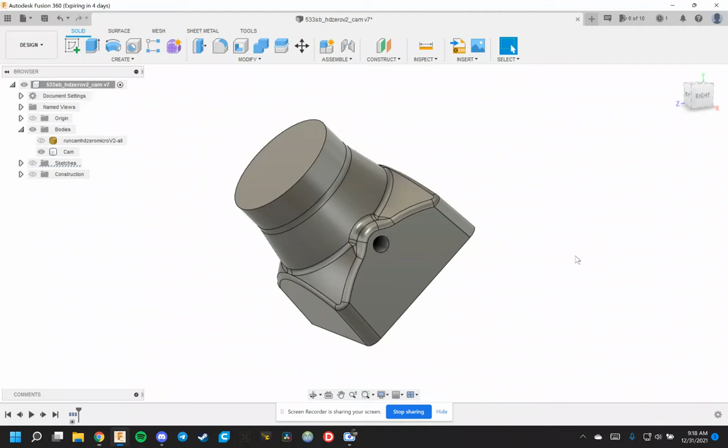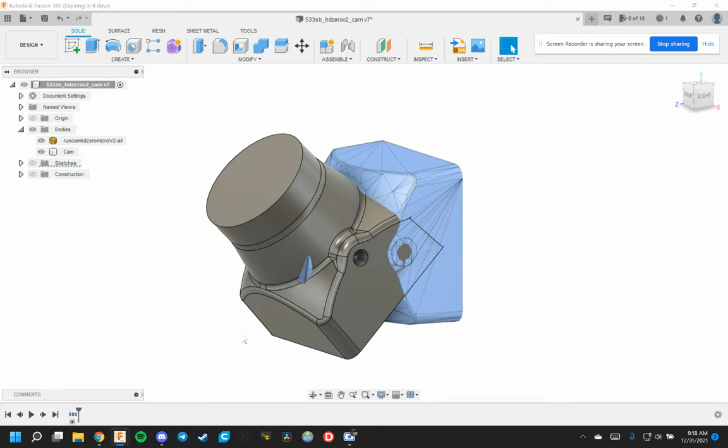Okay, so first things first, I needed a body to work with. The file provided for the camera was a mesh file, so I imported the mesh, just created a new file, inserted the mesh, and then when you bring that file in, you can basically clone it.

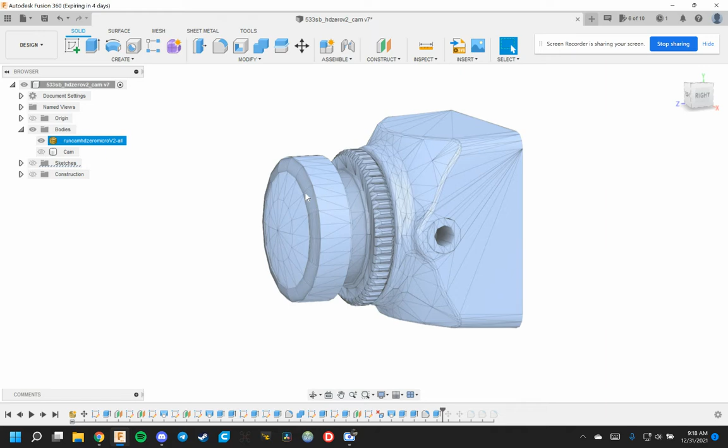There are details you obviously don't need, like this little lens retainer thing, so I just made a cone shape to cover that up. I'm thinking ahead about what the inside of the mount is going to need to fit the camera, so you only need basic geometry for that.

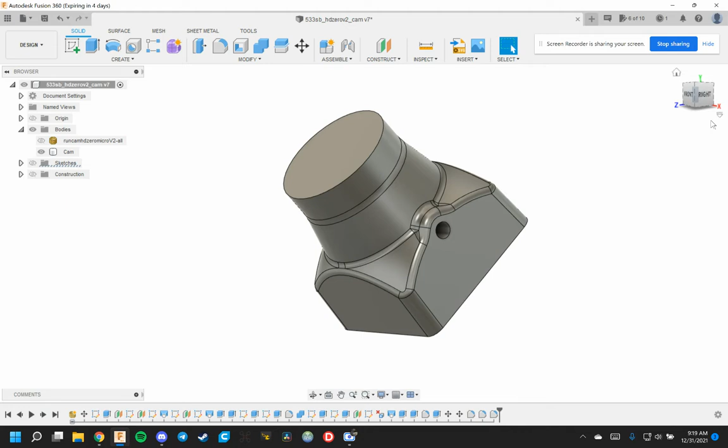Once you get that done, position it. I got the 45 degrees right here, and then start from there. I did a sketch back here and an offset of this perimeter. I think I was doing everything 1.6 millimeters, basically a multiple of a 0.4 millimeter nozzle.

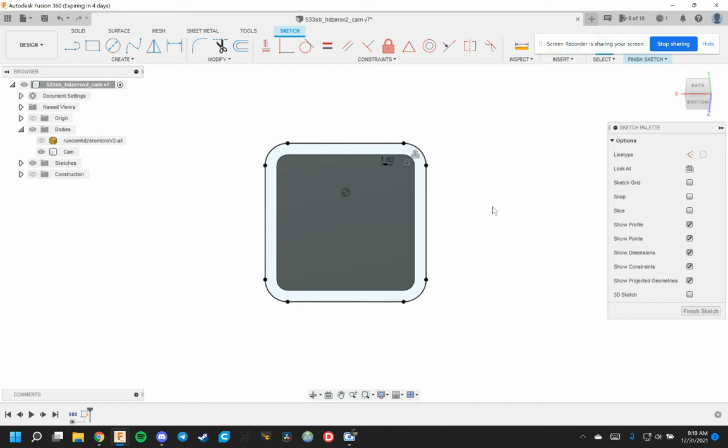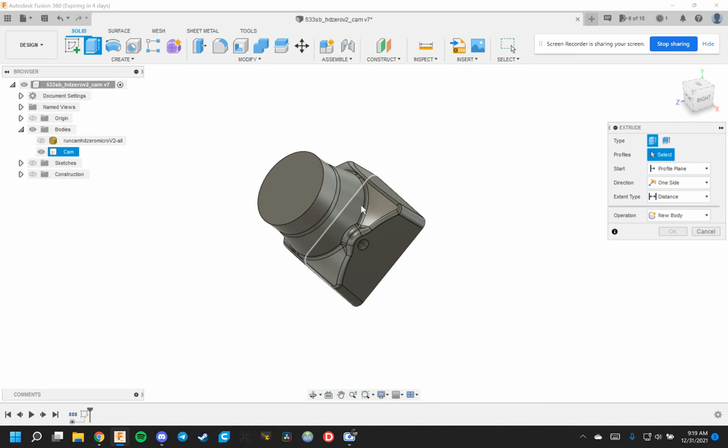So you've got to think that you want to create a shape that you can cut the camera shape out of. By doing this offset here, you can come in. Let's take the camera away for a minute. You can extrude a box out, extrude it out to the length of the camera.

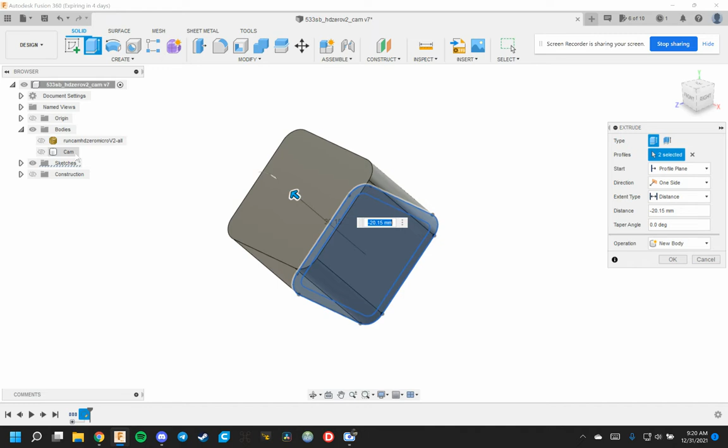Now I want to do a new body, and I want to make sure—well, I can leave the camera highlighted if I select new body. Select OK, and now you have two bodies: the square you created and the camera inside.

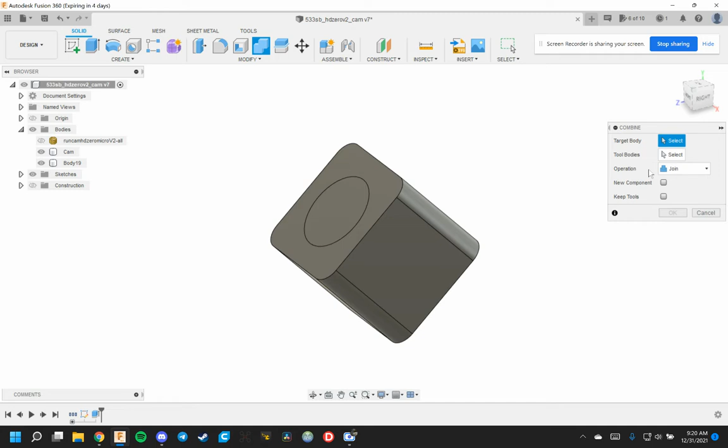Now I want to cut away the camera from the outside shape. To do that, you use the combine tool. You select your target body—the target is the body you want to cut. I'm going to change the operation to cut, select my target body, and then select my tool body, the body you use to cut away with.

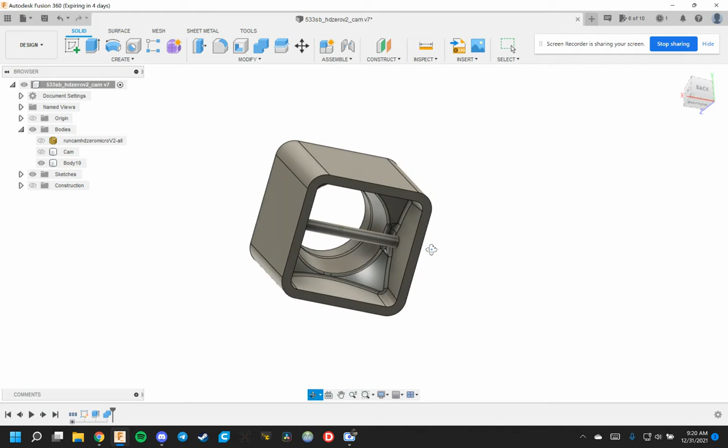Keep tools, because I want to keep the camera—I don't want it to cut away and disappear. Now I can deselect the camera and I have what's left over. This is just left over from the screw hole that goes all the way through, so you just select it and hit delete, and now you have your basic body.

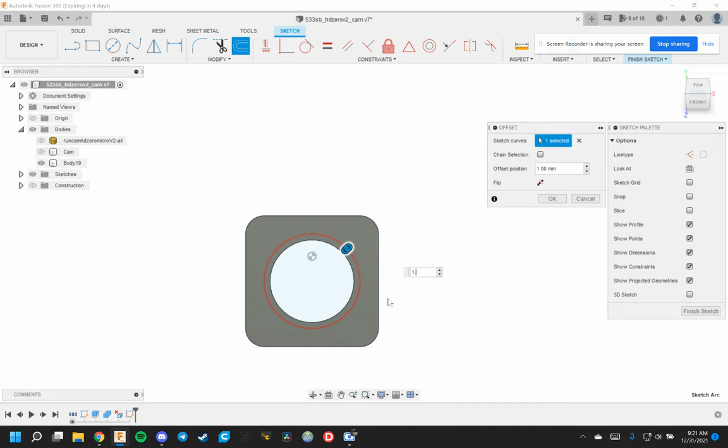Next thing I did was create a sketch here, offset this circle 1. Now I want to come in and take away some of this material, so basically I came down to just where I can't see any space there from the camera.

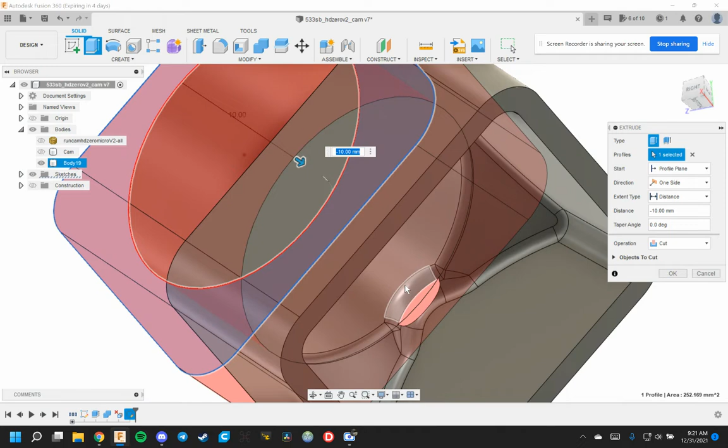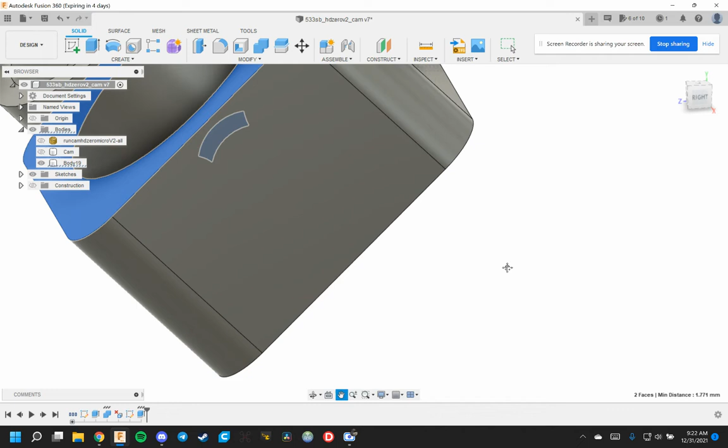You can see this opening here—you obviously don't want to see that. So you come up, and I added a few extra millimeters just to give it some absorption here. You can highlight the inside and see how much space you have. If you want, you can select this face, and you can see you have almost 2 millimeters at the smallest distance—from about here to here is about 1.7 millimeters, so that's plenty.

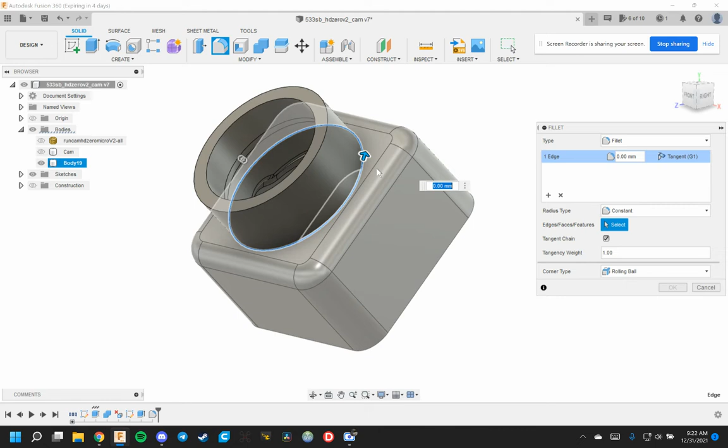Next, I came in with a fillet here, probably 2 or 3 millimeters—probably 3 won't fit, so 2 millimeters. Then I come in with the fillet here, just playing with it until I get something I like. Okay, so now you have the very basic shape.

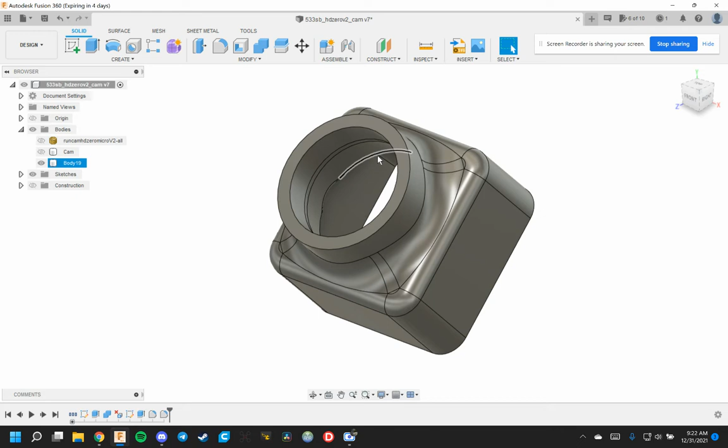Next thing I did to get the cone, you need to do a loft. You can't loft off of a face with a hole in the middle of it, so I did a sketch here, and then you extrude this circle, minus 2 or 3 or whatever you want, just to create a solid face here to work from.

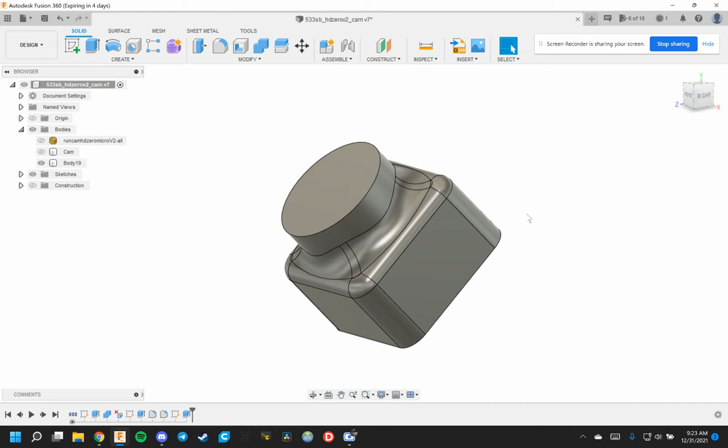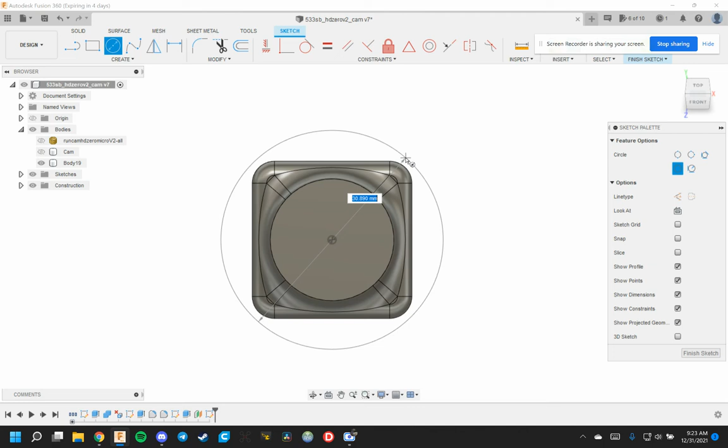Sorry, my radio's going off. So from here, you're going to do an offset plane—I think I did 3 millimeters here. Create a sketch on the plane, and you have to just play with it. I chose a few different numbers until I settled on around 30 millimeters. And even the offset of 3 millimeters, I think I did like 5 first—it was too far away, so I settled on 3.

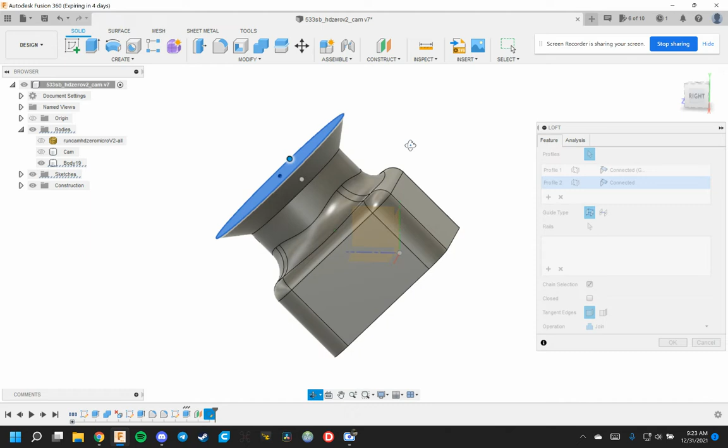Now you can use your loft tool here. You want to select this face and this new circle you created on that new sketch, which was offset 3 millimeters from the face. That gives you your cone shape.

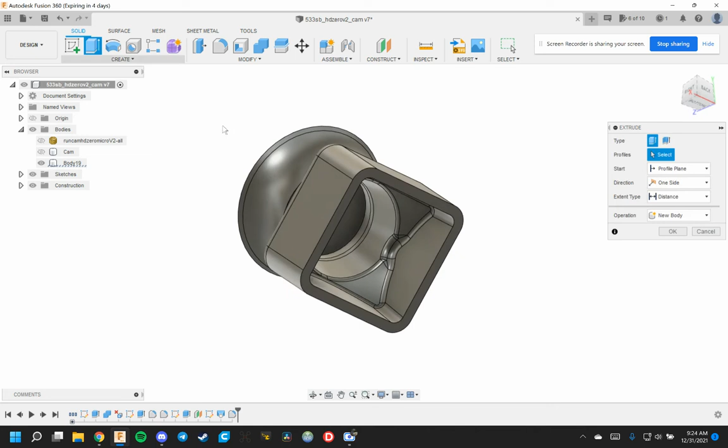Come in with the fillet tool here and just get something you like—I probably settled somewhere around here. Next thing you do is come in with your extrude, bring this opening all the way back out, and now you can show your camera. Come in with the chamfer here.

Until you get to the lip of the edge of the lens—3 millimeters looks pretty good. So now you're starting to get the shape that you want.

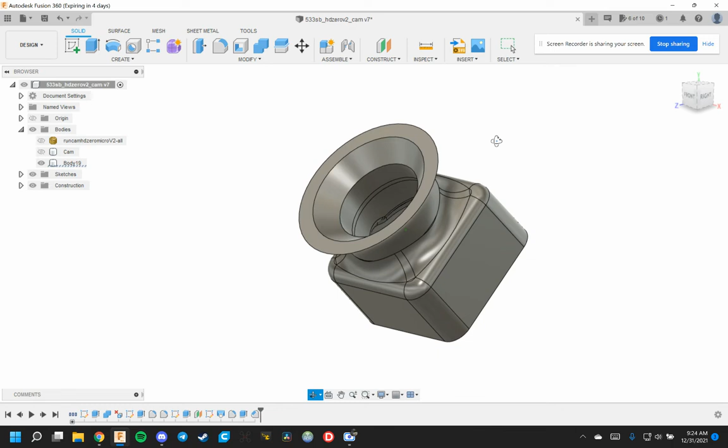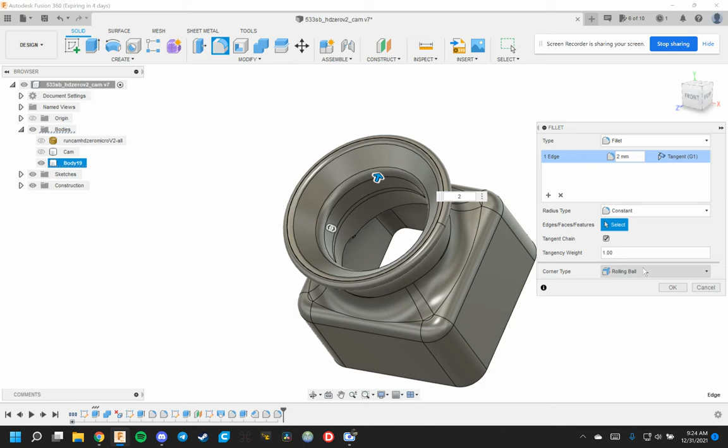I think I came in here and did probably a 0.5, maybe a 0.75 millimeter fillet—yeah, because that looks pretty good. Fillet here, maybe a 1 millimeter, to give it a nice round edge there. And then I probably did 1 here, maybe 2. Yeah, that's starting to look really good.

Nice and smooth, pretty organic with the fillets here. Yeah, that's nice.

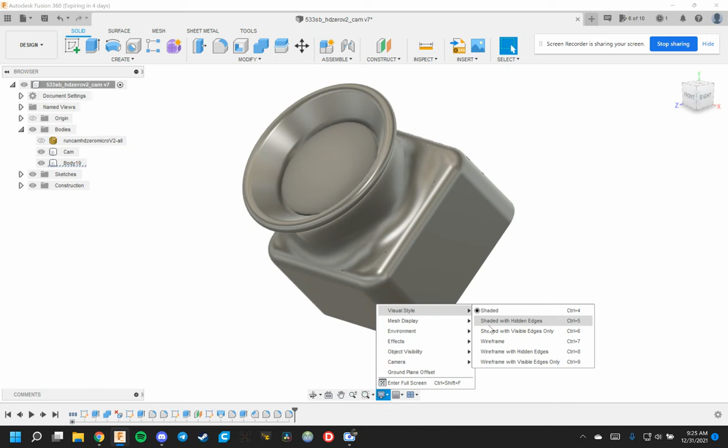So let's come back in and add in those supports here. This was kind of a challenge. I ended up doing something like, let's see.

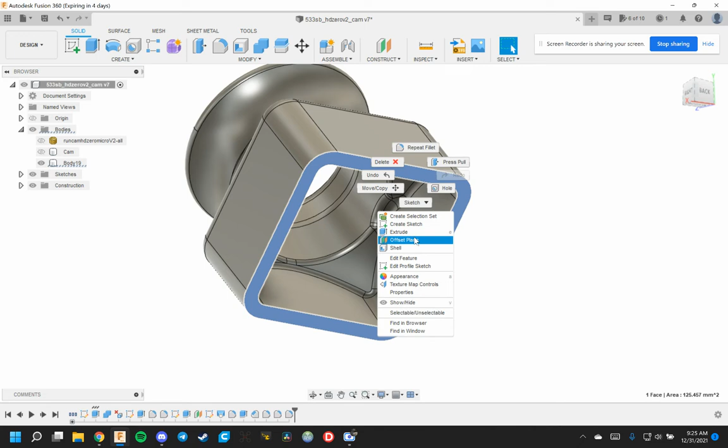So I created a sketch way back here. But what I could have also done was just offset a plane and bring that plane up to about probably this line here. Yeah, so that'll work. And then I can create a sketch on that plane.

Now, since I have this blank sketch with no geometry on it, I'm going to need to project some geometry. So I need this face. Since I didn't create the sketch on this face, I can't use these lines in my sketch. So what I have to do is project the geometry.

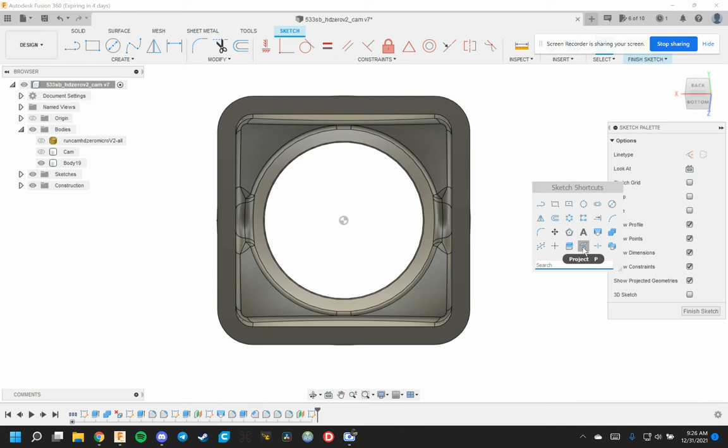So you use your project command. And since I'm in the sketch I just created, which is way up here on this plane, let me show you. I have a sketch on this plane here, and the geometry I project will automatically project to that plane. So basically that gives you some geometry to work from.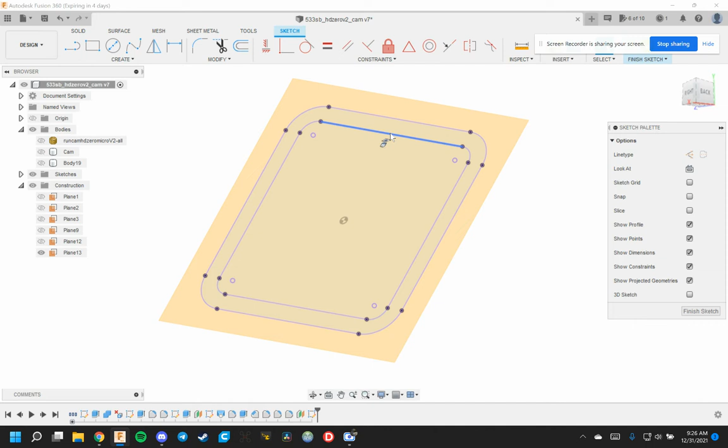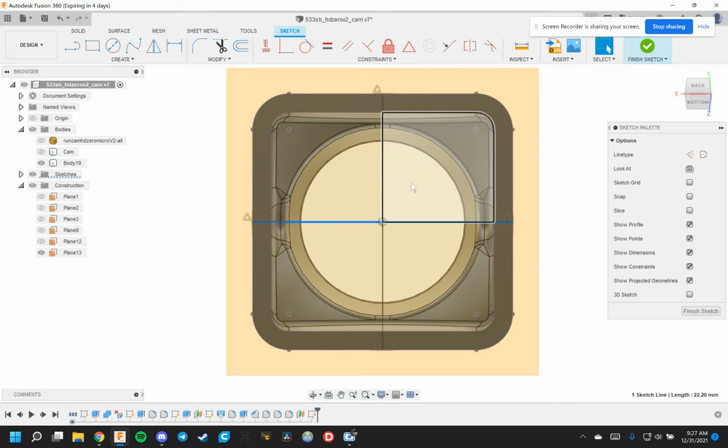And so now I can drop some sketch lines in here. Okay, so those are some sketch lines. Let me hide that plane, I don't need to see that. And then I come in here and drop some lines here.

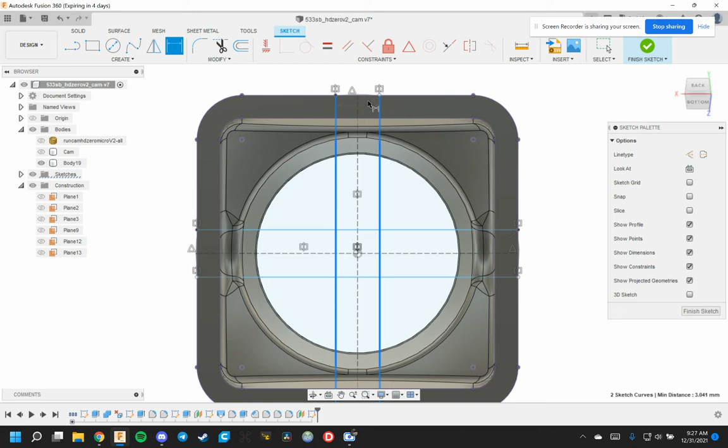I'll mirror these across the center line here. Give these a dimension of 3 millimeters, I think I settled on. I tried 2, it seemed a little bit small. 3 millimeters.

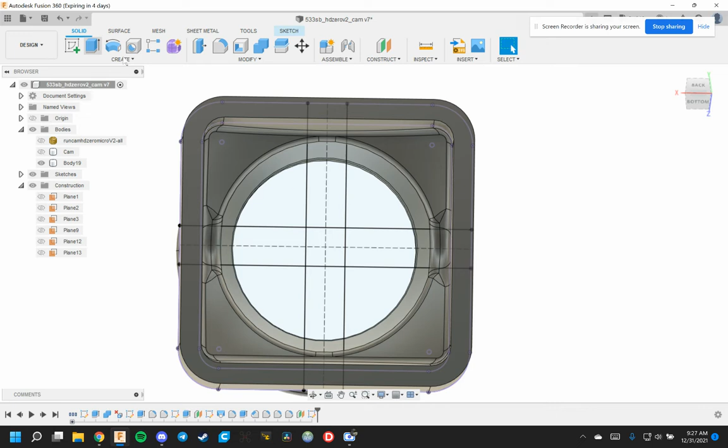And then I believe I'll need to offset. Well, here I'll get to that in a minute. So let me show you what this would end up looking like. So now you can hide the body, select these edges here, and extrude these out.

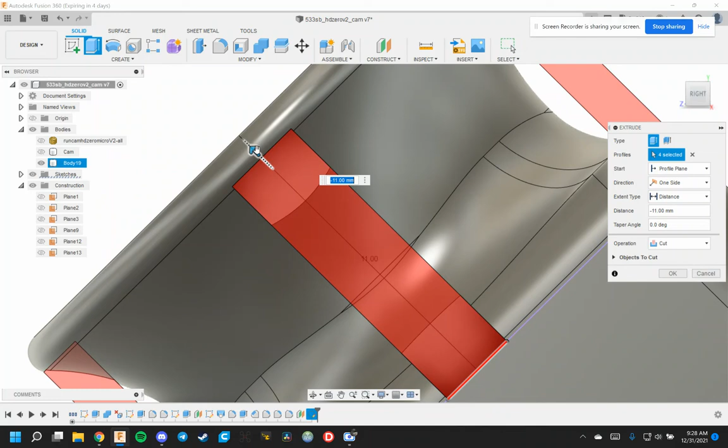Now the problem with this is now I have this space between every single one that I need to fill in. That's all right, I can add to that in a minute. So let's go all the way up to where, yeah see, that's good. It actually lands right in there.

Click join. Now you'll see how I had to play with this lip. I'm remembering how I did it, but the first time I think this lip was maybe too small or way too big or something, so I ended up going back and editing this.

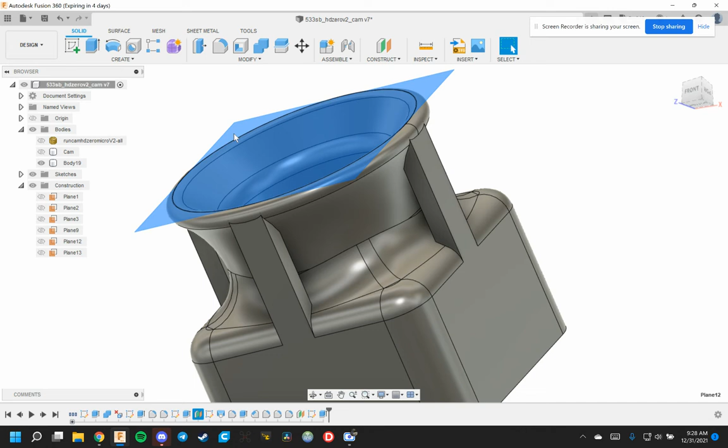I edited the plane. I edited the sketch, the circle that was 25 millimeters. I might have made it bigger or smaller. So sometimes you have to go back and play with it.

So anyways, I need this to actually fill all the way in here. So I can go back into the sketch. I can offset this plane in the negative direction. Actually, yeah, let's do that.

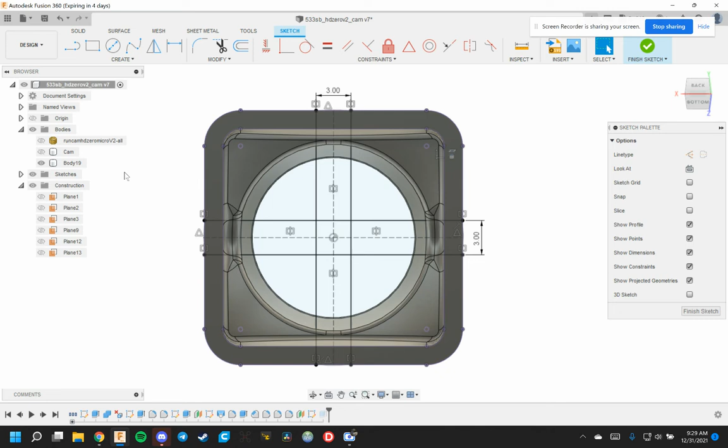Offset this plane inwards. I guess it's not negative this time, but I'll bring it in. Let's just try 1 millimeter. Okay, and now let me edit this extrusion to include this little extra space I have here and see if that's enough to hide that gap.

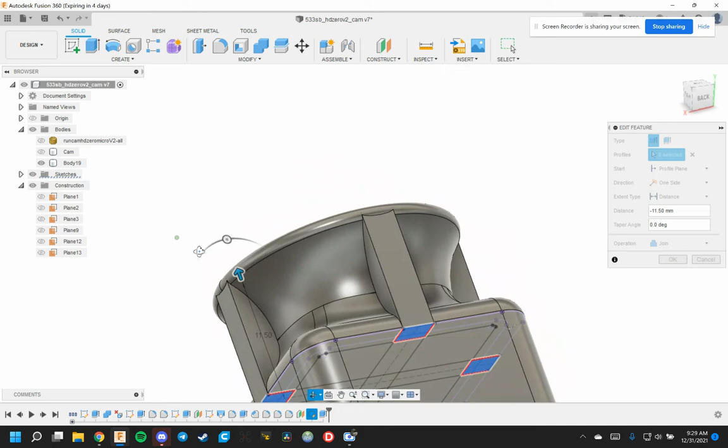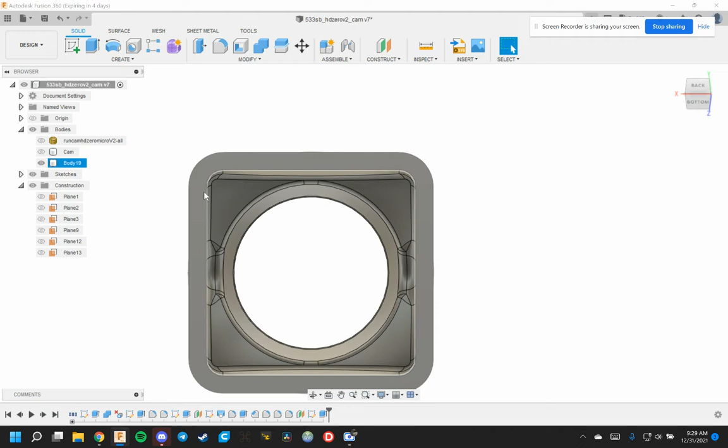It looks like it's not quite enough. There's a tiny little space. So we need to edit that offset. Let's do 1.25. Okay, and I think that probably did it. Ooh, not quite, it looks like. Oh yeah, that did it.

So that's basically it. And then you'll see here that since I had to extrude it so far to get it to hit this lip, it also extruded in here. But that's easy enough to get rid of those.

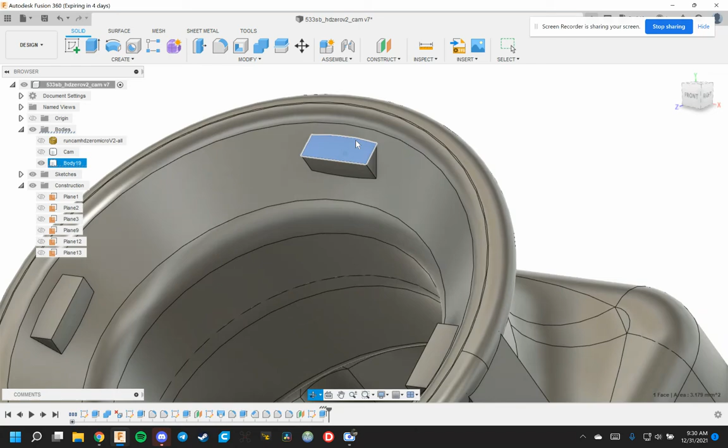You can just shift select, multiple select the majority of the faces. You don't even have to get all of the faces. And then hit the delete key and see, it knows what you're trying to do. And that only deletes those lips, what's left over. It doesn't delete the whole thing.

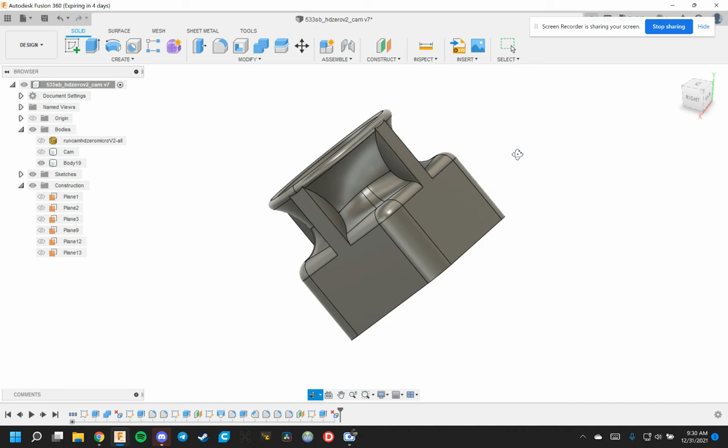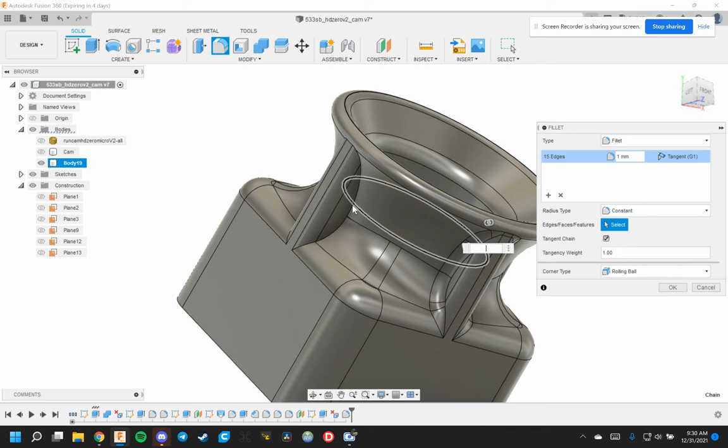From here, you just come in and add some fillets. I think I did 1 millimeter. Yeah, come in and add some more around here, probably maybe 1 millimeter again. Yeah. And that looks pretty good.

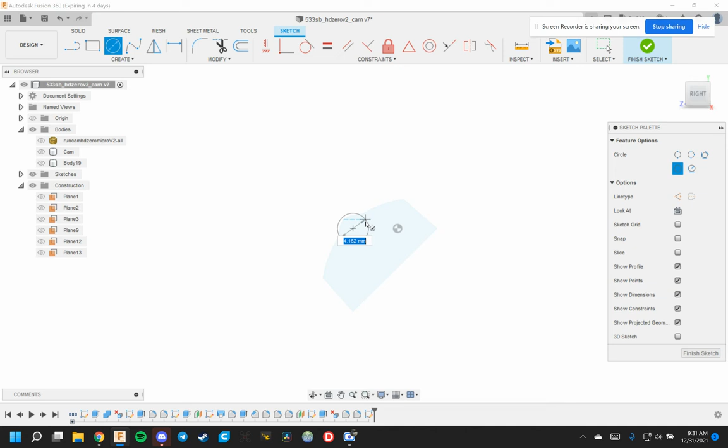So there's your basics. You can come in here, add in your 2 millimeter hole, two sides. Bring this one out to here. Yeah, and then all you've got to do is...

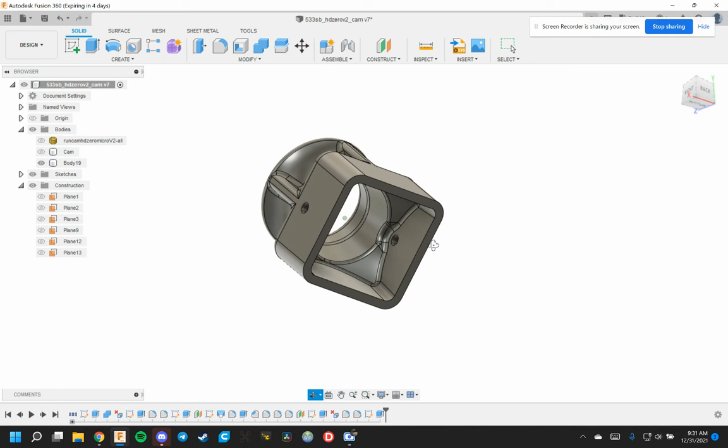I mean, this one body here I could reuse over and over for multiple frames. You come in from the top, create a new sketch, and then drop in your standoffs.

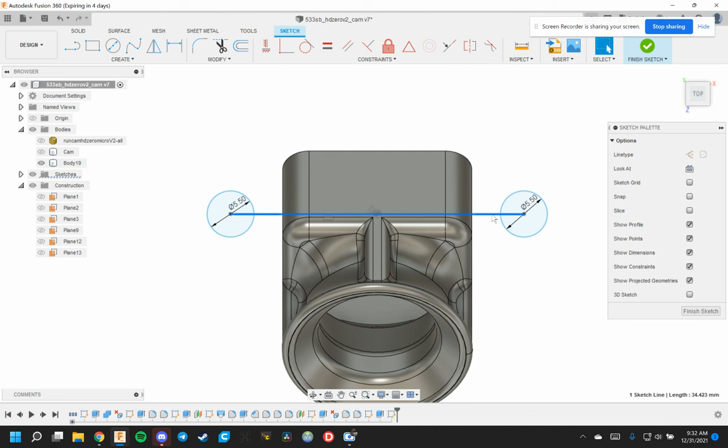So standoffs basically 5.5 millimeters. You're going to drop in another circle over here, 5.5. See, this is the issue I was having the first time, was I was spacing these at 28 millimeters apart right here, and it turned out that they were more like 26 and a half.

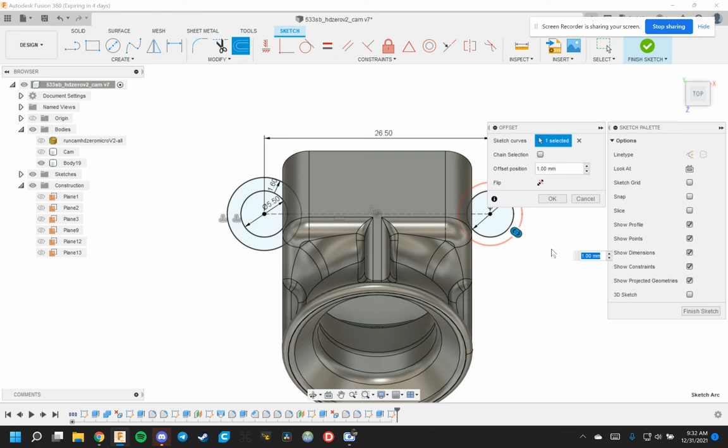So you come in here, do an offset, 1.6. I just like to use 1.6 just because it's a multiple of a 0.4 millimeter nozzle. 1.6, and then you can just...

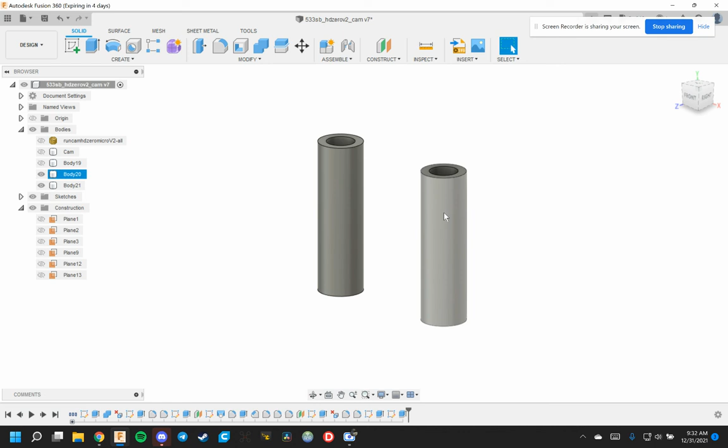Extrude these up. So I'll do 15, and then I'll do symmetric, so that's 30 millimeters total. And that's basically the spacing I have. Those are the standoffs.

That's the spacing for the frame. You can see where the camera would overlap, and then you could just use the combine command to combine these, and then start adding more fillets, keep playing with it.

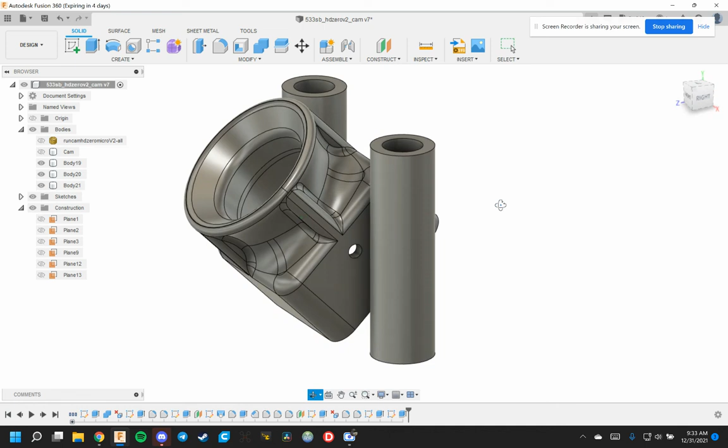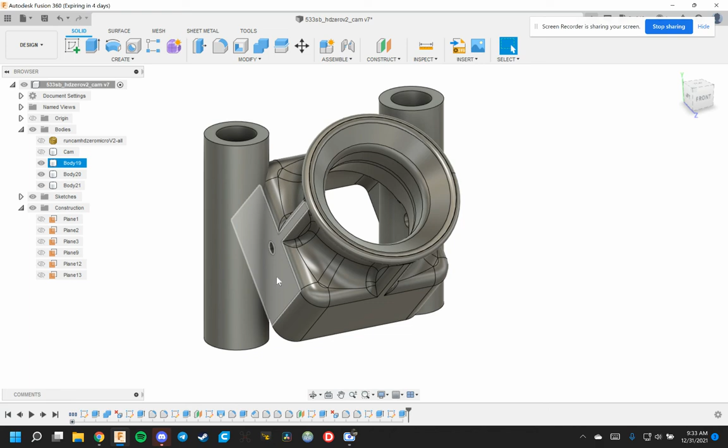So just remember, the most powerful tools for doing this type of work is your offset plane. You need that a lot of times to work. It's hard to explain it to work. If you need to match geometry, but spaced away from the actual geometry you're trying to match, you offset a plane there. I mean, yeah, hopefully that helps.